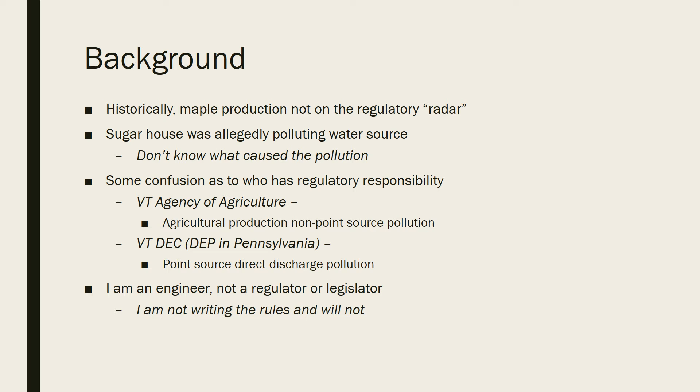So we don't have rules specific to maple right now, but maple operations do have to follow the required agricultural practices, which I have a copy of if anybody wants to look at them. Anybody that's familiar with dairy operations is probably taking a look at that. A lot of that is geared towards that. So there's nothing written in there specifically directed towards maple, but still you can't just put whatever you want into the waterways.

In Vermont, for Lake Champlain, we have the TMDL, the total maximum daily load, and that's primarily regarding phosphorus, which you've probably seen in the news. We got the algae blooms that are caused in big part by excess phosphorus pollution. So that's kind of one of the things that we want to look at in regards to maple is, what's the phosphorus loading coming out of maple sugar houses.

So, about the regulatory framework: maple in a sense is kind of like a point source, because you have the sugar house and a pipe coming out. But the regulatory tool that we have available is the NPDES permit, which is what all municipal wastewater plants have to get.

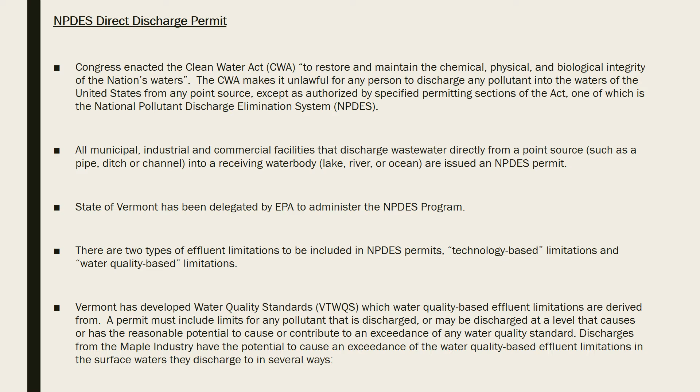But this framework doesn't really work well for maple. It's just a little too in-depth. So I want to just jump into what are the water quality things that we're concerned about.

So if you haven't heard of these, pH, that's the measure of the acidity of the solution. You've got your RO wash water, that's a highly basic solution, and you've got your evaporator pan acid, that's a low, acidic solution. To discharge a liquid, it's supposed to be between 6.5 and 8.5 for pH if it's going to reach a stream.

Temperature could potentially be a concern. Ideally you're not supposed to change the temperature of receiving water by a certain amount. Given that it's usually pretty cold during maple sugaring season, that's usually not too much of an issue regarding temperature.

Dissolved oxygen and BOD are two things that kind of go hand in hand. Dissolved oxygen is just how much oxygen is in the water. Fish need oxygen to breathe. And then there's biochemical oxygen demand, which, for your purposes, is usually just a measure of sugar. So bacteria in the water can eat sugar, and in that process of metabolism, they breathe oxygen just like we do.

So if there's an excess of sugar, then they'll start eating all of it, and they'll use up all of the oxygen, and that can cause oxygen depletion and fish kills, die-offs, that sort of thing. So that's why we care about BOD, which is essentially just a proxy way to measure the amount of sugar and waste that's in a discharge.

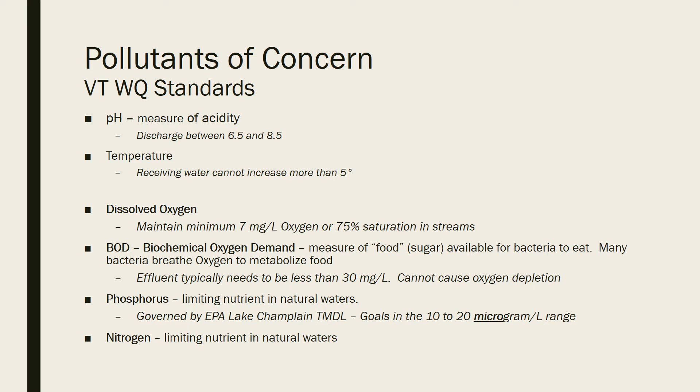So a little bit more just to put BOD in perspective. On a theoretical basis, I try to use this to give you a sense of scale. So finished syrup is really just a lot of sugar, and bacteria can eat that. So 2 tablespoons of syrup have enough food for bacteria that, in the process of eating that sugar, they will use up all of the oxygen in 1,000 gallons of water. So it doesn't take much to really have an effect, especially when you get the concentrated sap.

And it's not just the fish either, right, anything that's in that stream. Yeah, anything that requires oxygen. Mainly fish, but the lizards and everything else. So there's a lot of site-specific things. That's the finished syrup. There's a lot less in raw sap, but there's a lot of sugar still in the raw sap. And it kind of depends on the receiving stream. If it's a very small stream, it could have a bigger effect, but that's why we care about that.

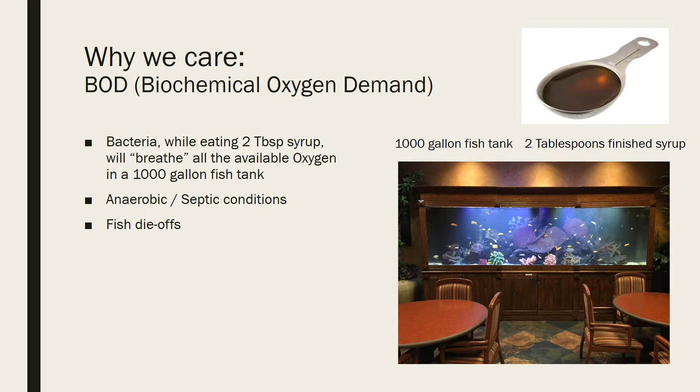The nitrogen and phosphorus, again, for Lake Champlain, we're mainly concerned with phosphorus and the algae blooms that phosphorus contributes to. What happens is you get this limiting nutrient that now you have a sudden excess of, and then algae start to proliferate at a high rate. The algae can put off certain toxins that just cannot be removed by our typical drinking water processes.

And then the algae that have proliferated, they die, and other bacteria eat essentially the dead bodies of the algae, and they eat oxygen. So in addition to having the algae bloom, you have oxygen depletion when you have excess phosphorus.

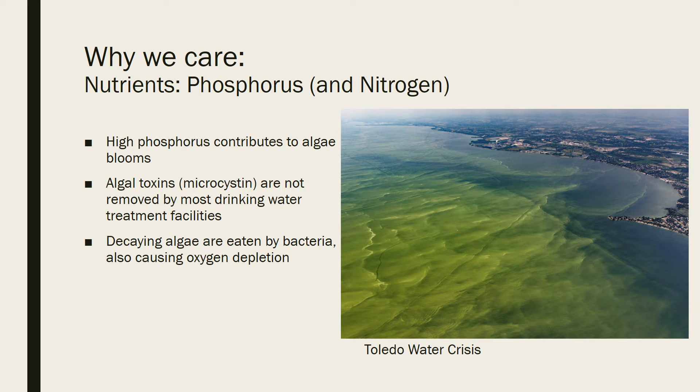So we've got a couple years' worth of study that we've done. Part of our initial goal at the agency is really just to identify and define what's in the various waste streams, and look at some of the chemicals that are being used, some of the cleaning chemicals, and see which ones maybe have phosphorus or have high sugar and contribute to high BOD.

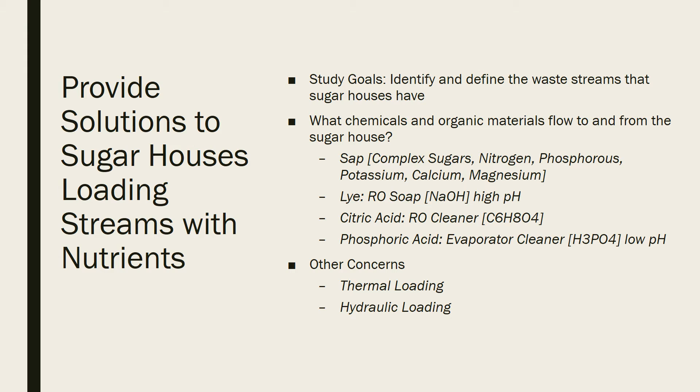So one of the things was just getting a handle on what's the relative volumes of waste streams. So I have this sort of process schematic, and this is based on just an arbitrary 100 gallons of sap coming into the sugarhouse. For an RO that's maybe a higher brix RO going up to 20, you're going to have about 90 gallons of permeate.

But we also wanted to get a handle on how much RO wash water volume is being generated, what's in it, what's in the evaporator wash water, and how much volume is it. We want to evaluate what's the feasibility of capturing some of these waste streams. Is it feasible? Is it economical for you as a producer to implement some of these things? And those are the questions we're aiming to answer with some of our studies.

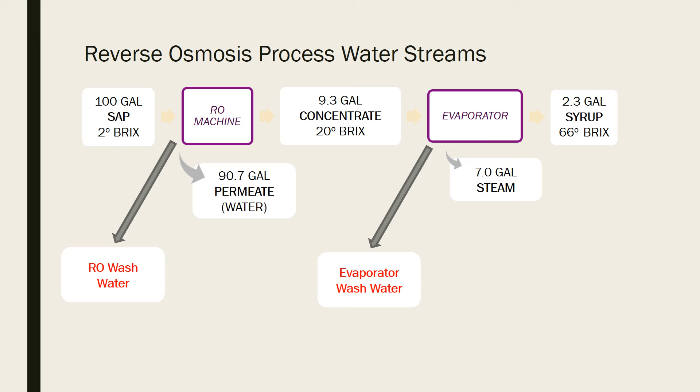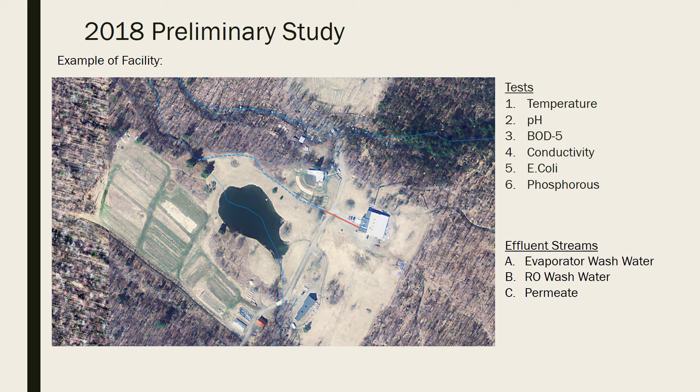So this is a little bit about a study the previous person did in the 2018 sugaring season. We have a facility near here, one of the larger ones, and we had a few sampling points, and this was just some really preliminary grab samples. We had 4 sampling locations, so everything coming out of this particular sugar house was coming out of a pipe into a ditch at location number 1. And there was a ditch that flows down to point 2. And these are just the 4 sampling points for some real preliminary stuff that was done in 2018.

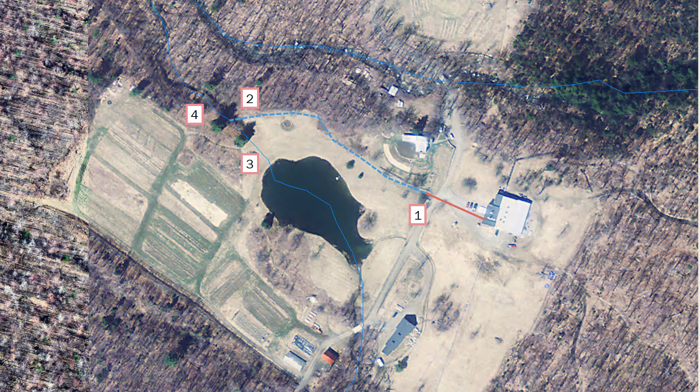And then there was a receiving stream, and so he also sampled just upstream and just downstream of the ditch that is carrying everything coming out of the sugar house. 3 is upstream and 4 is right downstream. So it's really just a few grab samples. The results were of limited value just because it's hard to time grab samples just right. But I'll show you some of the results from that one.

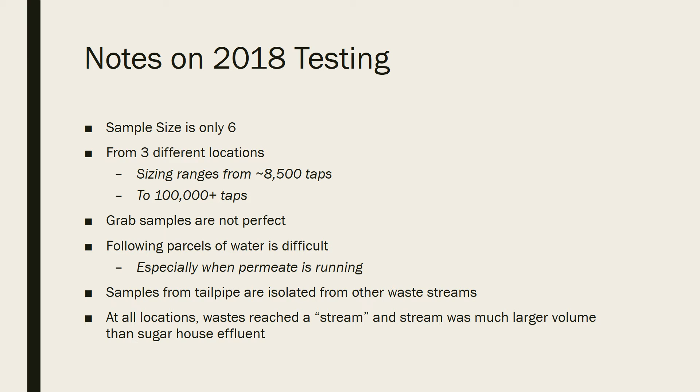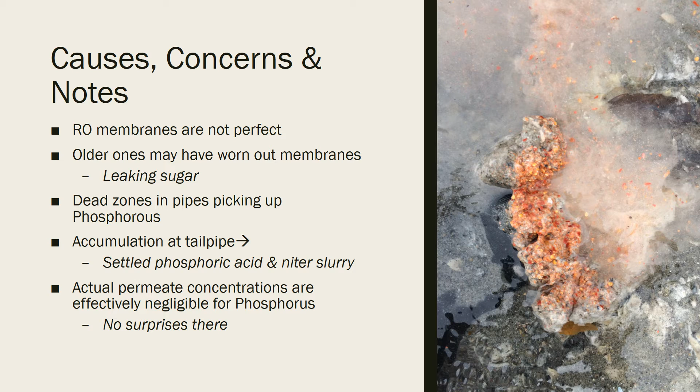And here's a picture right at the outlet pipe. On the face of it, that doesn't really look good outside of your sugar house, in a ditch that flows right to a stream. Let's jump into the numbers there.

So part of the goal of that year's study was to try to grab samples during different modes of operation. So one of the first ones was when they were just sugaring and it was just permeate coming out of the pipe. So he tried to sample at that point. And then later he tried to sample when there was an RO wash cycle going on. And then also there was a time when they were dumping out the evaporator pan acid that had been neutralized.

So this is when permeate is coming out, right out of the pipe. pH is in a pretty neutral range. BOD is at a 2, which is very low. For context, your typical household waste that goes into your septic system has a BOD of about 250, and household waste has a phosphorus of about 12,000 micrograms per liter.

But coming out of the pipe, the permeate looks pretty clean. It's got a relatively low phosphorus and low BOD. And you see downstream, there's actually more phosphorus already in the water than was in the permeate, it seems to say on this one.

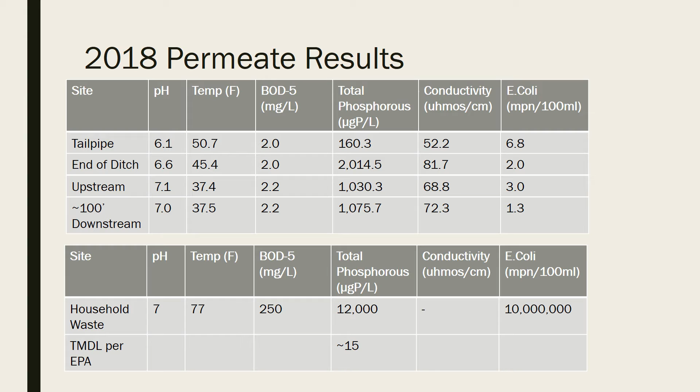Later, we tried to sample when there was an RO wash cycle and a rinse flush going on. And here, now you see that the BOD numbers have jumped up. Now you're at like 373, which is a lot higher than what's going into a typical septic system. The phosphorus is really high. You're now at 33,000, whereas previously you were at a couple hundred.

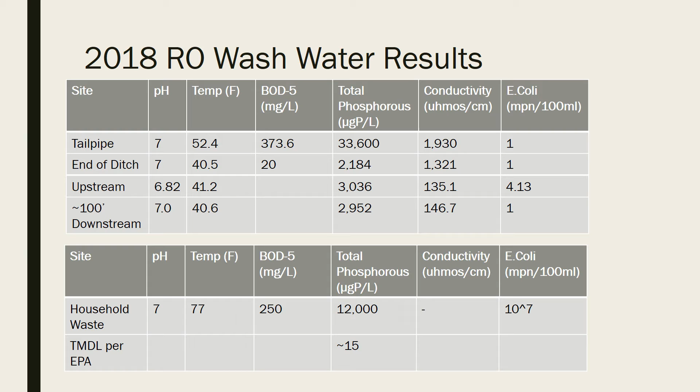So by the time you get down to the end of the ditch, it's diluted, or maybe samples were grabbed at not exactly the right time. But overall, by the time you get downstream, it seems to just get diluted. So maybe it's not having necessarily a bad effect on the receiving stream. But again, it's kind of tough to really say that with certainty based on just how the samples were taken in this initial study.

And then we get to the evaporator pan wash water when that was being discharged. Typically people use concentrated phosphoric acid, and you soak your pans in that. And when that was coming out of the tailpipe, now you've jumped up from 33,000 to 2 million. So concentration's gone really high. That's a lot of phosphorus. And again, for context, out in the main lake of Lake Champlain, we're looking to have 10 to 15 micrograms per liter, and this has got 2 million.

So that's an issue. By the time you get to the end of the ditch, things have diluted, or you don't grab it at the right time. It's gone down a little bit to 26,000. Then you see just upstream and just downstream, perhaps this ditch that's flowing into the stream is causing a jump in the phosphorus levels. The other thing you'll see is there's a lot of BOD in this evaporator wash water. So these are definitely things that are of concern. They can't be discharged into the water.

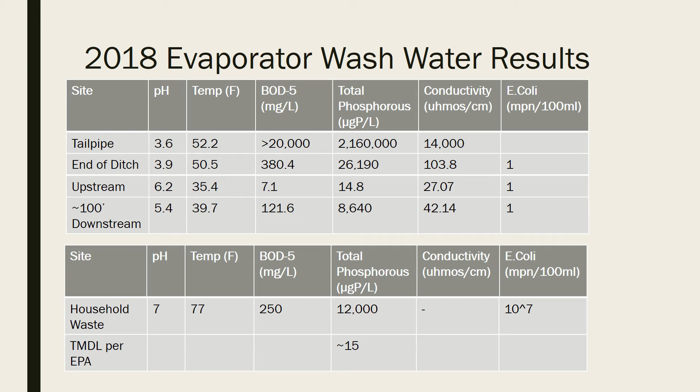So definitely, we think the evaporator pan acid is one of the bigger concerns. But we're also continuing to look at the RO wash water. There's a lot of sugar in that. So some of the real simple things we always try to say is to make sure you use permeate and flush out any sugar that's in there before you start your wash cycle. I imagine most people do that because you don't want to lose sugar. Try to get all the sugar out of there before you start the RO wash.

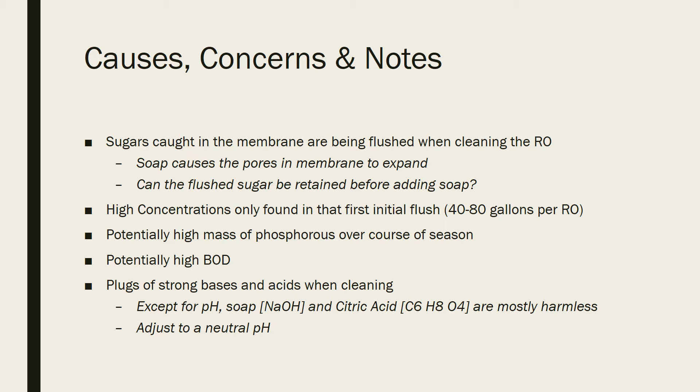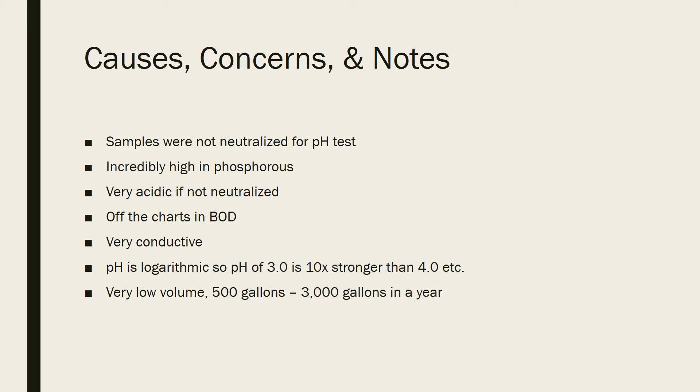And anything that goes out the door, you always want to adjust to a neutral pH. So, pH definitely you want to neutralize, and you want to be aware of anything that's still got a lot of sugar in it with high BOD. Let me move on.

So the preliminary conclusions we had is that regarding phosphorus, which is really one of the main concerns here, most of the loading is all due to the evaporator wash water. There's a very small amount of phosphorus in the other waste streams. But the evaporator pan wash water is also one of the smaller volumes generated during the course of the season. So we think that is probably the most feasible thing to try to capture.

A typical producer may only use a gallon and a half or two of concentrated acid over the course of the season. That obviously gets diluted 60 or 80 times. So you've got 100 to 500 gallons or something of diluted phosphoric acid. And that being a relatively small volume, we think it's a fair thing to ask people to try to capture that.

One of the issues with discharging waste from the sugar house during sugar season is simply the season. Things are cold, the ground is saturated and wet or frozen, and in that condition, things discharged to the surface of the ground are just going to run off. They're not going to infiltrate. So, especially for the neutralized phosphoric acid, if that could be retained, ideally it would be spread as a fertilizer over cropland, at a season where it will actually infiltrate into the ground rather than run off into the stream.

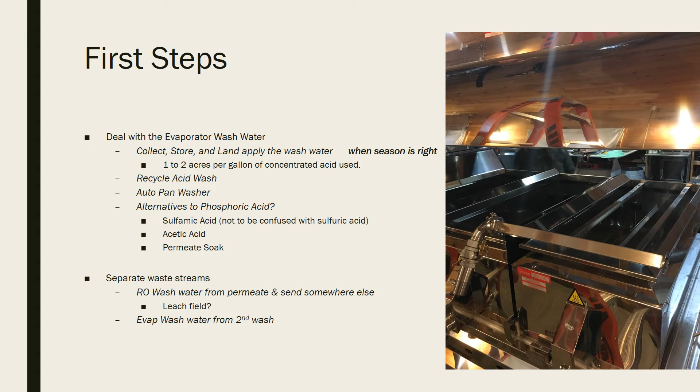A common question I get regarding phosphorus is, some people think that if you neutralize the acid, that gets rid of the phosphorus, but that just fixes the pH, which you do have to do. You have to fix the pH before you can let it go, but it doesn't remove the phosphorus, so that's going to stay there.

Again, reiterating that due to the season, remind yourselves that dairy farmers are forbidden from spreading manure typically on frozen ground, except under limited emergency circumstances. It's the same concept for maple. Just realize that due to the season, things are going to have a high probability of running off and reaching a surface water.

Another thing is at the front of the season, some people tend to dump raw sap for whatever reason, and that has a lot of sugar. So try to be mindful that you're bringing all of this product from your entire sugar bush to a single location. Now you're potentially dropping it into a stream. You've brought a lot of material into one location, which can cause issues for the receiving water.

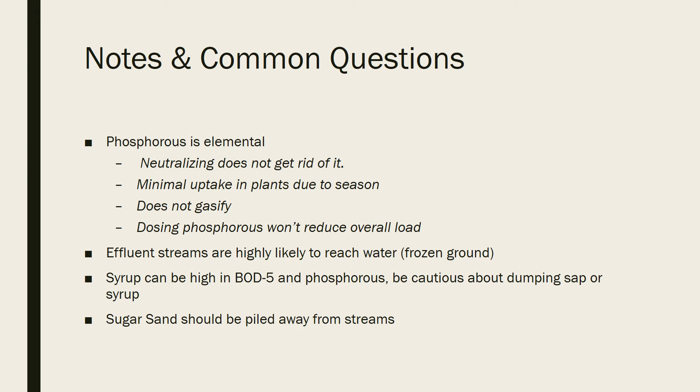So some of the questions we're continuing to look at is looking at different RO membranes and seeing if there's some different effect on what's coming out. We wanted to look at permeate also because that's probably the largest volume of waste that's going to come out of the sugarhouse. Everybody thinks that it's supposed to be just clean, clear water, and that it's safe to discharge.

So one of the things we wanted to really answer is getting some data on permeate to justify that assertion, and to really have some defensible data to protect the practice of being able to just discharge permeate, because we realize that for most people, because permeate's the largest volume of waste, it's going to be the least feasible to implement storage or treatment for. So we really wanted to collect data on permeate and prove whether or not it is clean enough to discharge. Some of the membranes potentially could leak enough sugar that could cause a water quality issue.

So in 2019, we had about 15 different facilities, folks that have worked with us, allow us to come and collect samples. We tested raw sap just to get some base numbers on that, and we collected a lot of samples on permeate. And the other thing we focused on last year was the RO wash water.

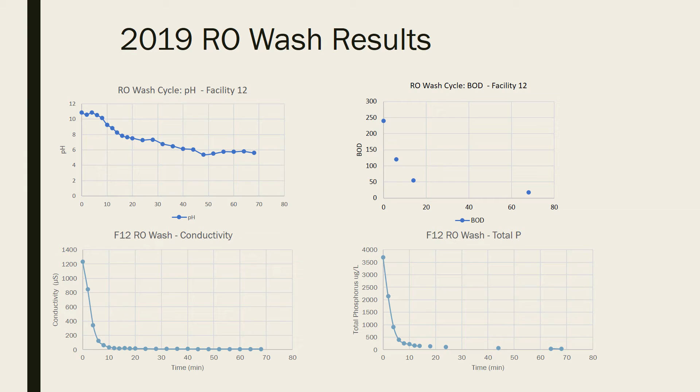Definitely ask your distributor for the MSDS sheet and look at the actual chemicals that are in your RO soap. Try to pick something that doesn't have phosphorus, and that would eliminate a lot of the concern there. And then we had permeate. One I'm going to show you is BOD. So we've got about 18 different samples that have a BOD in the 0 to 20 range, which is very good. That's clean. That's what's typical of a clean river or stream.

But we had just a few samples that came up a little bit higher. So we want to kind of investigate what maybe was going on at these few facilities that had a high amount of sugar in their permeate. One of the things we've kind of realized is that there's kind of two different perspectives at work for BOD. So from a sugar making perspective, this amount of sugar is really a negligible amount for your operational bottom line, but it can be a significant amount of sugar from a water quality perspective.

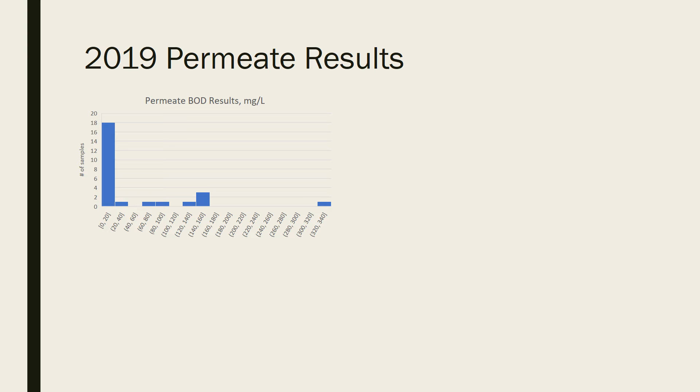So if your membrane is passing maybe 1 or 2% of your sugar that was in the raw sap, that's maybe an acceptable loss from a business standpoint, but not necessarily a good thing from a water quality standpoint. So we want to kind of work to figure out what exactly is going on at just a couple of places where we saw higher BOD levels in the permeate, whether it was just cross-contamination with other things, or if it's an issue with the membrane. So we're going to continue to look at that. But overall, permeate typically is pretty clean. There's a lot of data, and again, we're still waiting on the final report, this all collated, put together.

I showed this slide before. Previously, it was for 100 gallons of sap coming into the sugar house. Again, to illustrate the sense of scale, we've got very small producers and very large producers. This is for a hypothetical facility that has 200,000 taps. Now, over the course of the season, you've got maybe 3-point-something million gallons of sap coming in, and now you've got 3 million gallons of permeate water. And when you get to these higher volumes, that's why we definitely want to make sure that the permeate water is definitely clean, because that's just a different sense of scale here.

One of the things the agency considers, as it looks at additional rules regarding maple, is a sort of tiered system like we have for dairy farms. We have large farms, medium farms, small farms, and the largest farms have to meet tougher standards and tougher rules. So we may end up at something like that for maple, where the largest producers have to face tougher regulations and maybe have to get their permeate tested to prove that it's clean before they're allowed to discharge it. So that's just another part of the conversation: what's the scale that we're talking about.

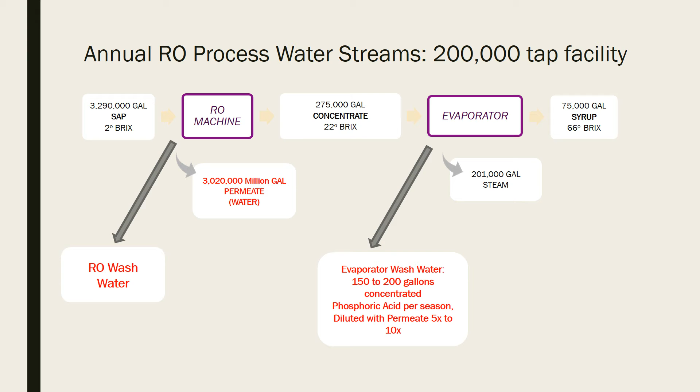And again, for that particular facility, they're using a lot more of the concentrated acid. They're using maybe 200 gallons of concentrated phosphoric acid in a season. And when you do the math, figure out what's the total mass there, and then try to put that in perspective with some TMDL numbers, you really see it. So 200-something gallons of concentrated acid is 830 pounds of phosphorus in one short maple season.

Whereas when you look at the required reductions that we have to achieve in, say, St. Albans Bay, the amount that this one producer would be using is like 20% of the reduction we have to achieve in all of St. Albans Bay. So there are actually significant levels here, potentially, especially for the larger producers. And with a lot of very small producers, it starts to add up. So we realize that they are actually relevant numbers.

I did want to just spend some time to answer any questions, and just reiterate, we want, as an agency, to work with the industry to make sure that we have rules in place that are feasible for folks to implement, that are fair. And so we definitely want to get folks' input as we, in the next few years, potentially have rules that are written specifically for maple.